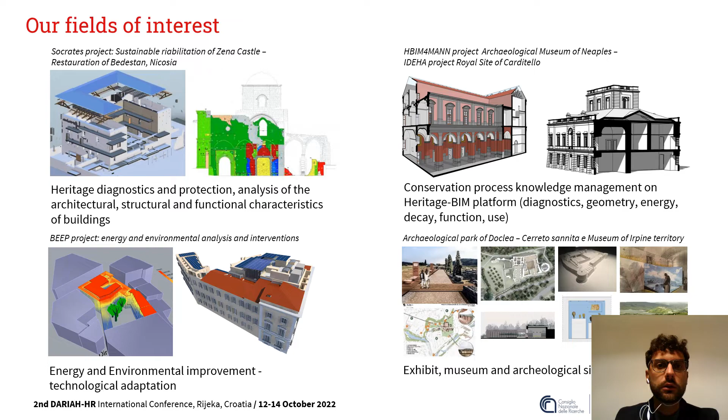These are the main areas of intervention of the lab, ranging from diagnostic and protection analysis to conservation processes, knowledge management, but also energy and environmental improvement and museum and archaeological site design.

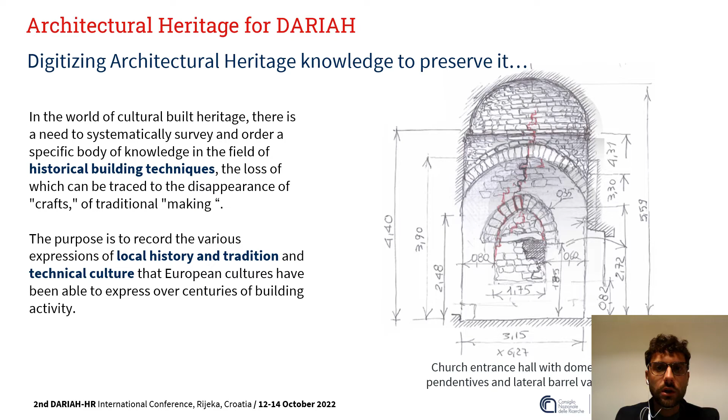Inside DARIAH, we want to start a discussion about the theme of the digitalization of built heritage to build a main point of contact for architects, experienced conservators and researchers interested in implementing digital-based methodologies and strategies for information models that can represent the uniqueness of our architectural heritage and its historical, artistic, and technological components.

Through research, workshops, and collaboration with other DARIAH working groups, we would like to work to address best guidelines and practices for managing open data with semantic, spatial, and temporal subsets through the development of a sort of pan-European virtual lab aimed at offering services and resources for data representation and management.

This digital resource will enable interdisciplinary exchange and interoperability, as well as promote a culture of data sharing regarding the permanences and mutations of common architectural typologies built over the centuries in Europe and their inclusion in modern society.

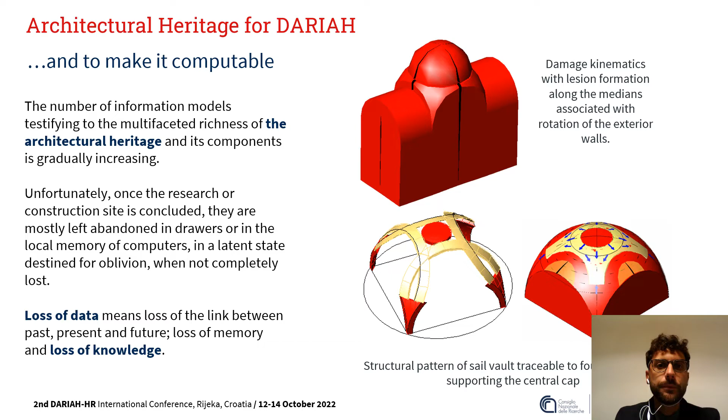This idea comes from the fact that in the context of building processes concerning the investigation, conservation and management of built heritage, the complex preliminary phase of study and documentation of a given building is characterized by heterogeneous qualitative and quantitative data. This profoundly affects all proposals and actions taken by the different specialists involved with their related processes and needs. Therefore, any gaps, inconsistencies, or misinterpretation of the data may subsequently lead to wrong decisions in the phase of intervention, with consequent damage to the artifact.

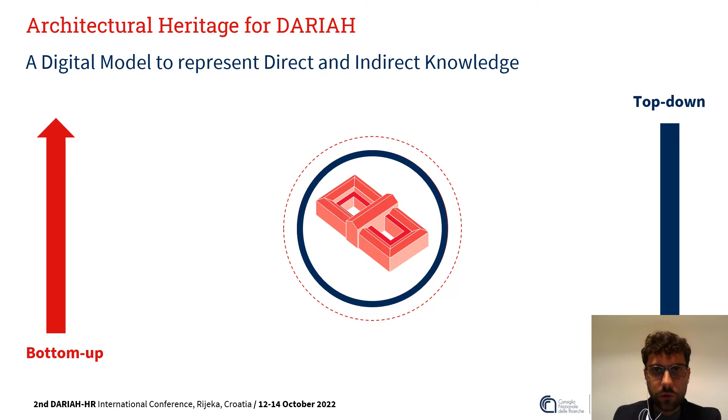Thus, knowledge representation and management has always been one of the most challenging topics for the heritage industry, both in terms of documentation and accessibility. However, the processes concerning the study and documentation of built heritage are still generally managed through a document-based approach that is directly derived from the traditional bibliographic one.

One proposal may be to create a digital inventory within which it's possible to integrate all this knowledge. This would allow for a repository where data can be stored and organized even when not directly attributable to building objects.

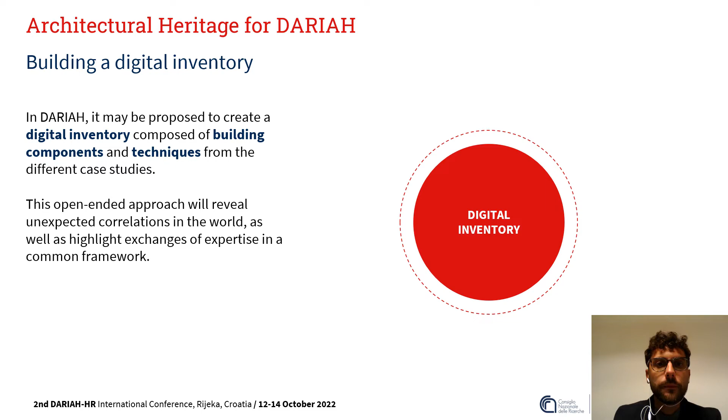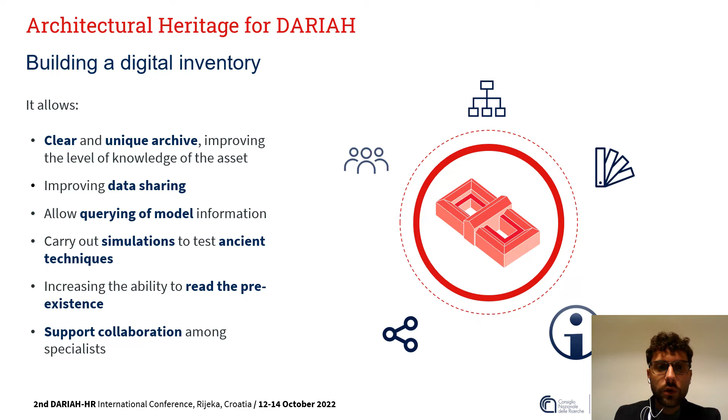In general, this approach can have many positive effects on the process regarding the built heritage. In particular, those are the benefits that we believe are the most important for this project: having a unique archive of data, supporting collaboration among specialists, and having this knowledge represented will allow the querying of this knowledge.

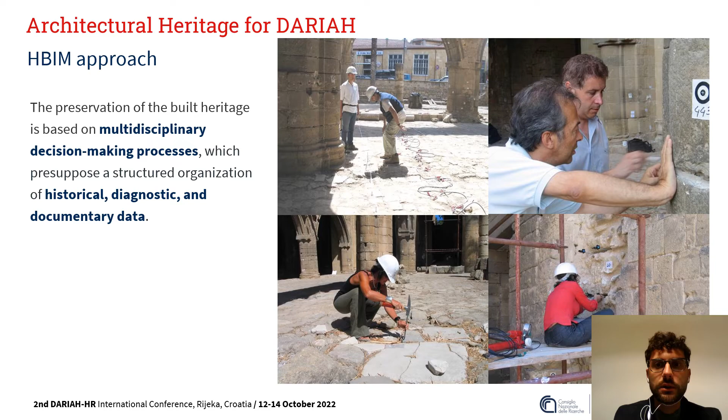One viable avenue is the one of building information modeling. Today, the application of BIM processes in the cultural heritage sector has focused mainly on digital documentation of buildings, fueled by technological developments and three-dimensional data acquisition. HBIM processes, on the other hand, lend themselves to integrating the management and production of information through the life cycle of property into a centralized, efficient, consistent, and non-redundant system.

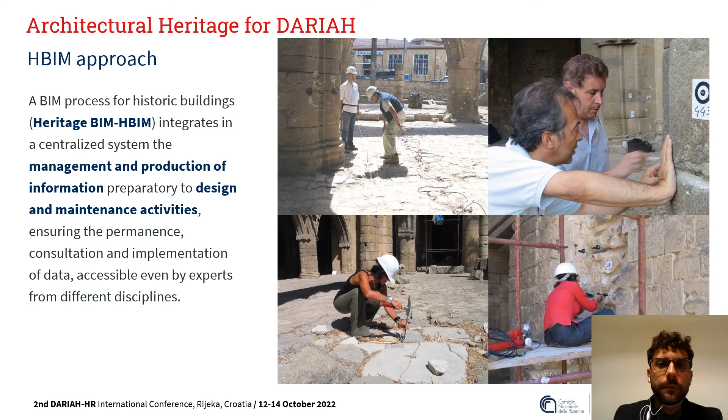Each HBIM represents a dense case of knowledge, so it's a drop in the ocean represented by monuments and building systems around the world, with little accessibility to a larger audience and no cross relationship with other similar libraries. HBIM can feed the digital inventory we want to develop within a spatial and temporal structure.

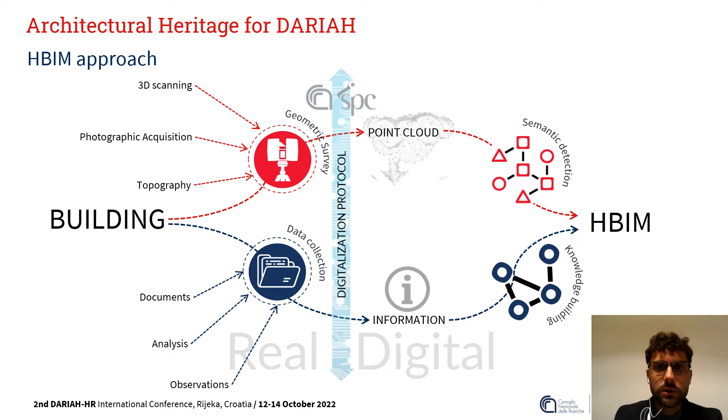This is a representation of the methodology we use when tackling HBIM modeling of a historic building. We start with the analysis of the assets, left of the diagram, in which we collect both geometric and informational data, and all of this data is then pivoted through digitalization protocol into the geometric and semantic rendering of the building. So within the HBIM methodology, it is possible to integrate a whole series of inputs within a federation of models that concerns geometric survey, multidisciplinary analysis, simulations, design and maintenance activities.

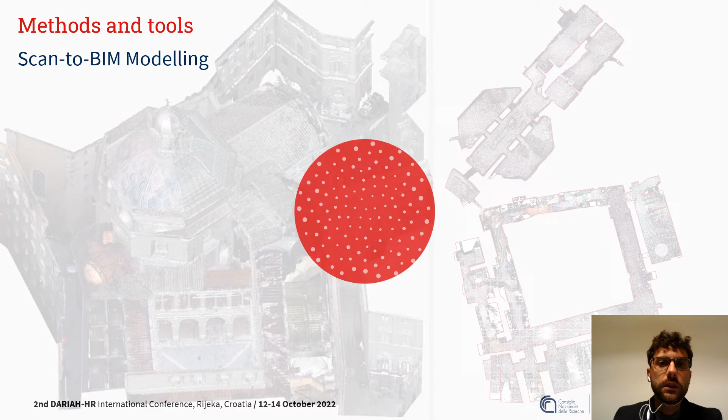In this area the scan-to-BIM method is often used, which starts with an integrated geometric survey, integrating laser scanners, LiDAR, photogrammetry, from which a point cloud is derived, which is then used as a scaffold for the construction of the buildings.

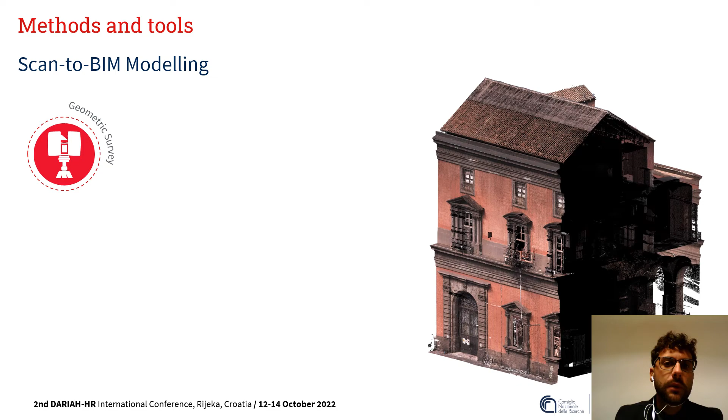These manual processes have their own great usefulness for building knowledge, because they allow us to delve into the construction systems used, the building modularities and patterns, as well as its irregularities, which are often clues to some historical phase or particularity of the building that in fully automatic processes, when one day they will be made possible by technological evolution, might otherwise be lost.

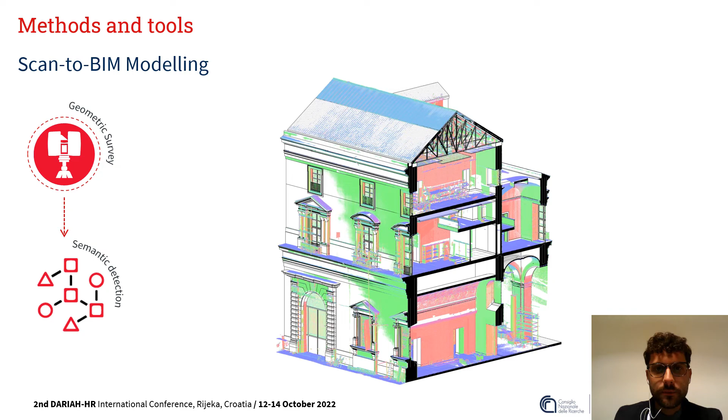Of particular importance is the decomposition of the building into building elements and spaces that allows this to be traced back to BIM object classes. Such work is essential for a solid and reliable structuring of the database, with data in the BIM environment related to the model objects.

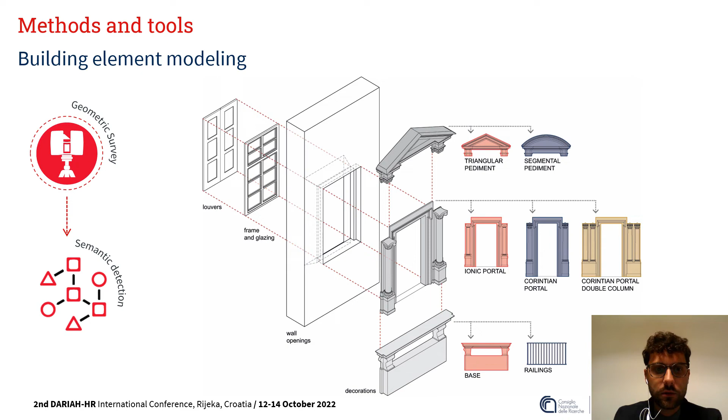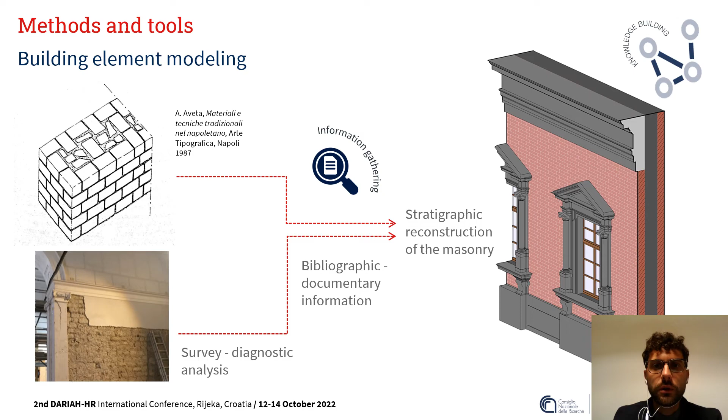The results and experiences of the projects that we have dealt with during these years have consolidated in us the conviction that there is a need to systematically survey and order a specific body of knowledge in the field of historical building techniques, the loss of which can be traced back to the waning of crafts of traditional making. So the unavoidable purpose appears to be to record the various expressions of local history, tradition and technical culture that European cultures have been able to express over centuries of building activities.

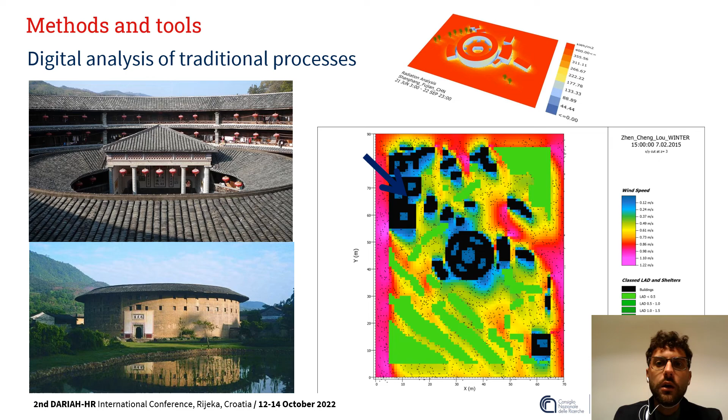Another way to produce and share knowledge on historical construction techniques is the study from an energetic and environmental point of view of historical buildings and settlements, which can also be carried out using the digital tools of numerical simulations. So in this case, the analysis aims to verify the effectiveness of ancient settlement principles for both documentation and conservation purposes, and also for guidance for new construction.

So, with ontologies we can represent different knowledge domains pertaining to tangible or intangible knowledge, direct or indirect knowledge. So, heterogeneous knowledge sources that can be shared among specialists.